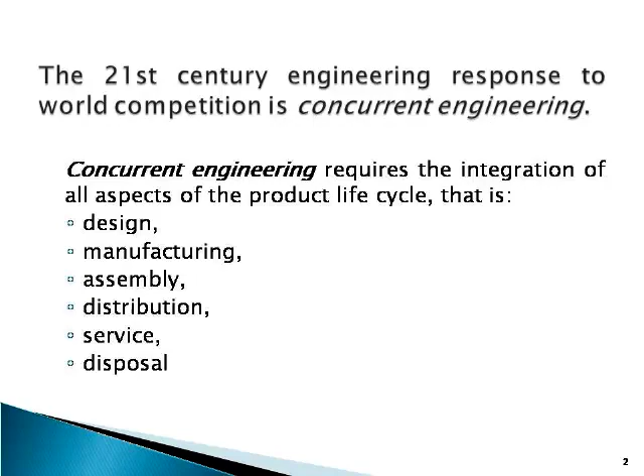The 21st century engineering we are entering in, its response to the world competition is concurrent engineering. Concurrent engineering requires the integration of all aspects of the product life cycle, that is design, manufacturing, assembly, distribution, service, disposal. Two important areas in the life cycle of a product are design and manufacturing. Process planning serves as an integration link between design and manufacturing.

Process planning consists of preparing a set of instructions that describe how to fabricate a part or build an assembly which will satisfy engineering design specifications.

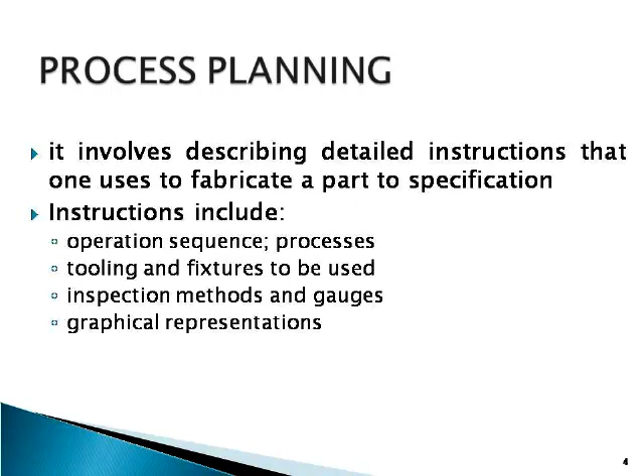So let us now discuss the process planning in detail. It involves describing detailed instructions that one uses to fabricate a part to specifications. The instructions include operation sequences or the processes, the tooling and fixtures to be used, inspection methods to be used, gauges to be used, and the graphical representations, etc.

Process planning is an act of preparing a detailed processing documentation for the manufacture of a piece part or an assembly. Systematic determination of the methods by which a product is to be manufactured economically and competitively. These are all various ways that we can discuss the process plan.

But we often confuse two words. One is process planning, the other one is production planning. In fact, process planning is entirely different from production planning. I am going to give you those things here.

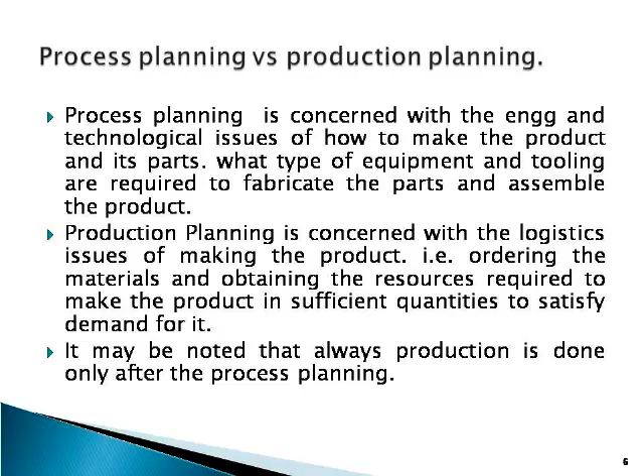Process planning is concerned with the engineering and technology issues of how to make the product and its parts, what type of equipment and tooling are to be used to fabricate the parts and assemble the product. Whereas production planning is concerned with the logistics issues of making the product, that is ordering the material, ordering the tools, obtaining the resources required to make the product in sufficient quantities to satisfy demand. It may be noted that production is always done only after the process planning.

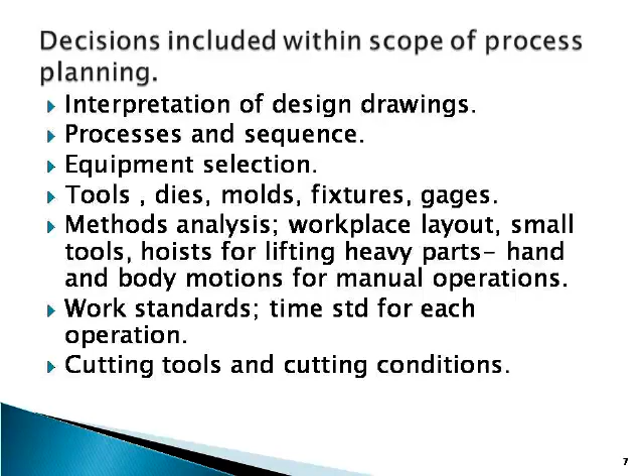The process plan indicates the routing sheet previously shown, and the drawing of the part. Scheduling is also a sheet which is done along with the process plan. With all these details, the drawings of the part, the route sheet, scheduling sheet, and process plan sheet, all put together will be sent to the manufacturing departments for the manufacturing people to follow the manufacturing steps in order to realize the component.

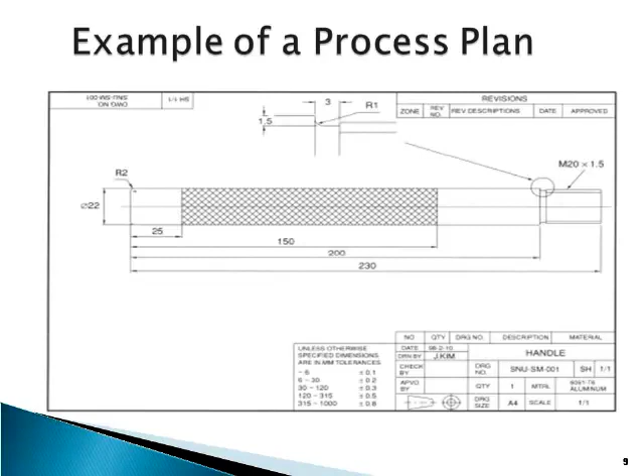So this is another typical process plan sheet being used. This is more or less a standard one, but the format could be different for different manufacturers. These are typical process plans used in industry, shown for our reference and better understanding.

If the process planner's productivity is significantly improved—because process planning is one act based completely on the process planner's view, expertise and knowledge—hence process planning done by one process planner could be different from another, and his time is very, very important.

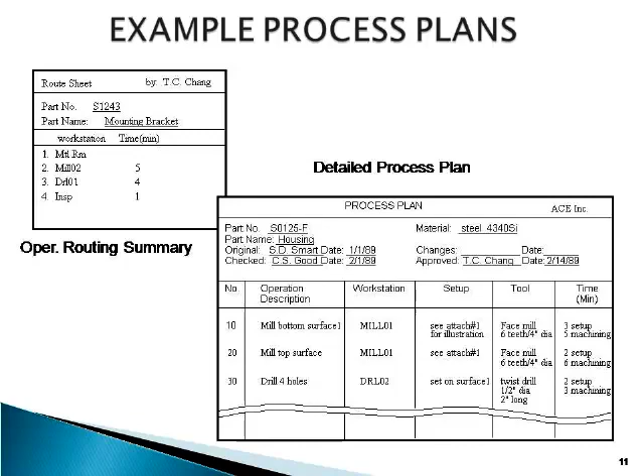If he could save his time, he would be able to spare the remaining time on various other aspects to improve productivity. He can spend more time on methods improvements and cost reduction analysis. Routings can be consistently optimized, and manufacturing instructions can be provided in greater detail.

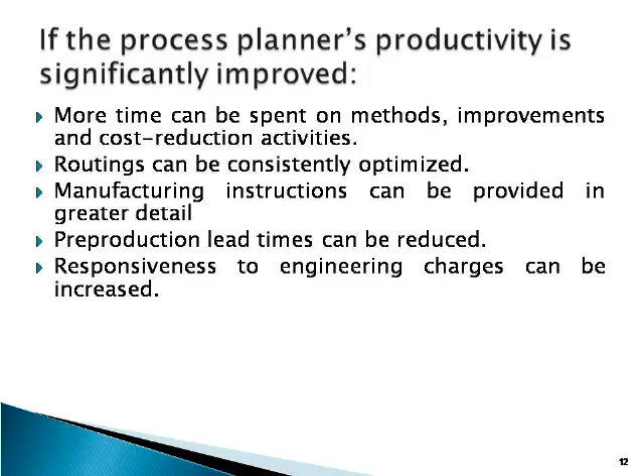Pre-production lead times can be reduced. Responsiveness to engineering changes can be increased. And the development of process plans involves a number of activities.

First is part print analysis, called analysis of part requirement. Then selection of the raw work part, that means the basic shape and size of the workpieces. Determining manufacturing options and their sequences. Selection of machine tools, selection of tools, work holding devices, and inspection equipment. Determining machining conditions and manufacturing time.

What is this analysis of part requirements? The part requirements can be defined as part features—process that includes the process determination steps of processes, dimensions, which will determine decisions regarding selection of machine tool size, and tolerance specifications, where the capability of machine tools can be selected based upon the tolerance specifications, and the CNC code generations, etc.

And selection of raw workpiece involves attributes such as basic shape of the workpiece. You can have standard materials, whether rod, slab, blank or profile, and the dimensions. Sometimes pre-shaped materials like cast parts, forged parts, extruded parts, and so on.

Size of the workpiece, basic raw material, and size of the machine tool—the size on which this workpiece is capable of being held—and material conditions, tool selections, and other things.

Determining manufacturing options and their sequences: selection of the processes based on availability, accuracy requirement, suitability, and cost. Sequence of operations—there are several operations. What operation is to be done first? What operation is to be done next?

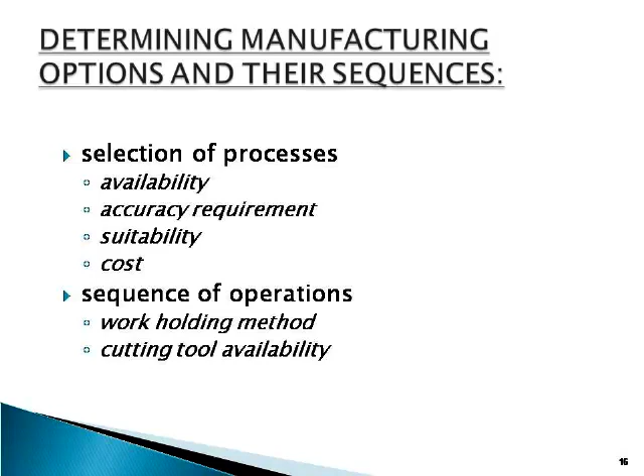Work holding methods: how best you have to hold the work so that maximum number of processes can be done on the given workpiece without change of setup.

Cutting tools availability, cost of the cutting tools—you can do the operation with the least cost tools, or you can do the operations with more costly tools. All this depends upon the process planner and how he selects it, and a very important thing is selection of machine tools.

Workpiece related attributes like part features and dimensions, dimensional tolerances, and raw material form. Machine tool related attributes, which include process capability, size of the machine, and mode of operation—manual, semi-automatic or automatic, CNC. If it's a CNC machine, CNC tooling capabilities, type of tool, size of tool, and tool changing capability, manual or automatic. Production volume related information is also required.

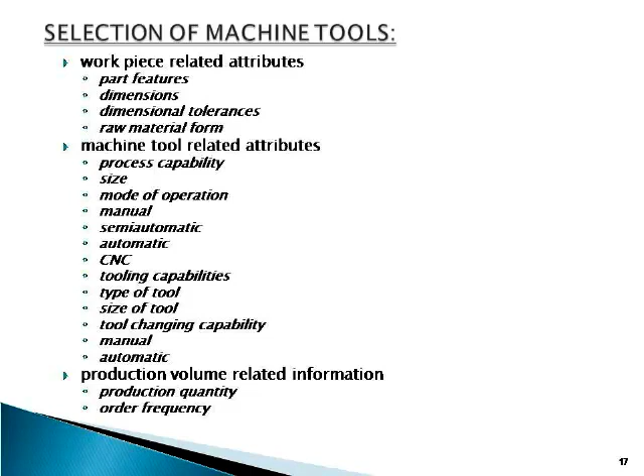For example, reaming cannot be done without drilling, so first a drill must be selected to drill a hole, then a reamer to ream the hole, and if tapping is to be done in the drilled hole, it can only be done after the reaming operation. Drilling, reaming and tapping must be done sequentially. You cannot do the reaming operation first and then drilling next. So this selection of sequence of steps is a process plan.

Take similarly the turning operation. There are several operations that can be done on lathe machines: simple turning, orthogonal cutting, tapering, profile turning, grooving, facing, face grooving, form cutting, boring, drilling, and several others like parting, threading, knurling. All these operations can be done on lathe machines. So you have to select the machine, select the process next, and select the tool also for that operation.

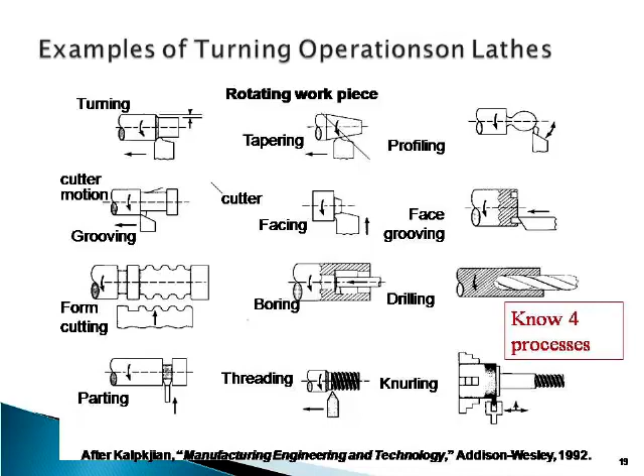Sometimes several lathe machines are available, and the appropriate lathe machine must be selected. This is done through evaluation of machine tool alternatives, based on machine tool capability, also called process capability. Process capability has to be evaluated for all the machine tools available on the shop floor, and this can be done by statistical tests.

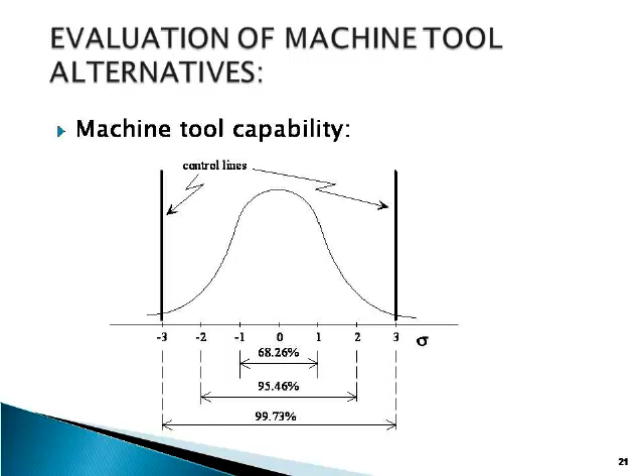After machining several components, say 100 or 200, in the same universe of discourse, you take the mean size and the deviations, plot them as a normal graph, and observe the deviations in plus or minus 3 sigma levels. Accordingly you calculate sigma, called standard deviation, as the square root of sigma of (x minus x bar) squared divided by (n minus 1), where n is sample size, or sigma equals R by d2.

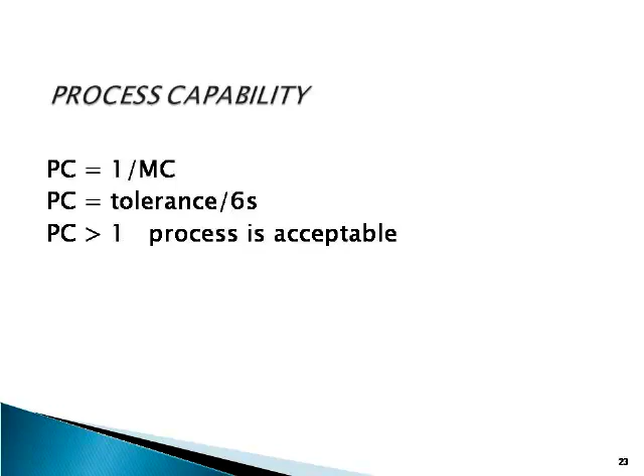Machine capability can be calculated as 6 sigma divided by tolerance, multiplied by 100 for percentage. Machine capability less than 100 means capability is good; more than 100% is not acceptable. So you must select the machine tool which is acceptable. Machine tool capability and process capability are inverse parameters: process capability equals 1 divided by machine tool capability, and is also equal to tolerance divided by 6 sigma. Process capability more than 1 means the process is acceptable, and if there is a choice of machine tools, the one with higher process capability must be selected.

Sometimes you can also select a machine tool based on the unit cost of the product. This is again a statistical test only; the distribution and size of finished parts are assumed to be normal. It can be done only by conducting statistical tests, and the results are available on the shop floor. The process planner should have these details before starting the process planning activity.

So they know the process capabilities and the cost of parts produced on a specific machine tool. This is done where ZU and ZL are the standard normal variates for upper and lower tolerance limits, TU and TL are the upper and lower tolerance limits, mu is the mean of the population, and sigma is the standard deviation. The portion of acceptable parts, AP, can be calculated as phi of ZU minus phi of ZL.

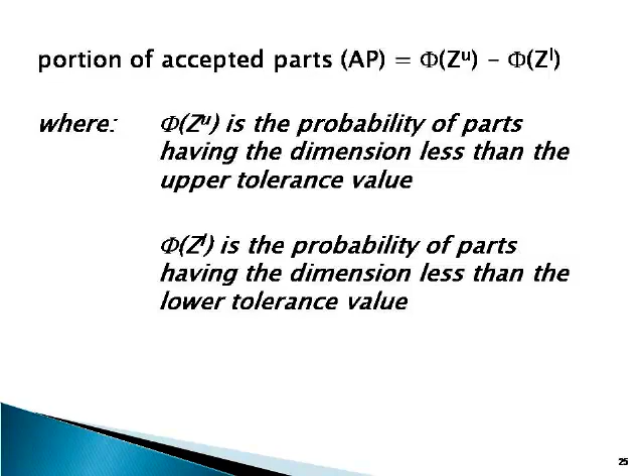Phi of Z of U is the probability of parts having dimension less than the upper tolerance value, and phi of Z of L is the probability of parts having dimension less than the lower tolerance value. So this is a typical process capability study, and how to calculate the portion of acceptable parts.

These are all already available, and this data is very much required for the process planner, then the selection of tools, work holding devices, and inspection equipment.

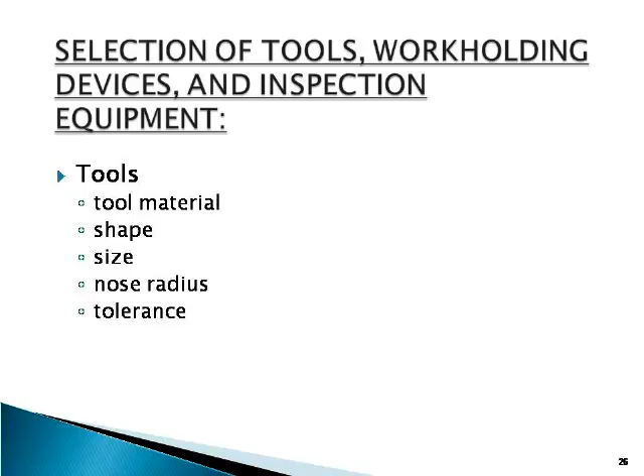Tools, we have to select based upon the tool material, shape, size, nose radius, tolerances. Suppose if it is a single point tool, we have to select the tool parameters also, because the kind of tool signature or tool nomenclature required for processing one kind of tool material could be quite different from other kinds of tool materials.

For example, if you drill in brass or copper, the point angle is less, sharp, compared to drilling a steel plate. So the tool parameters, tool signatures, or tool nomenclatures could be different. We must select the tool material and tool nomenclature depending upon the kind of workpiece for which you are selecting the machining process.

Work holding devices: the primary purpose of a work holding device is to position the workpiece accurately and hold it securely. Manually operated devices are collets, chucks, mandrel, faceplates. Design devices include power chucks, specially designed fixtures and jigs. Flexible fixtures are used in flexible manufacturing systems, like pallets and other things.

Inspection equipment includes online inspection equipment and offline inspection equipment. And the planner also selects the cutting conditions and the manufacturing times.

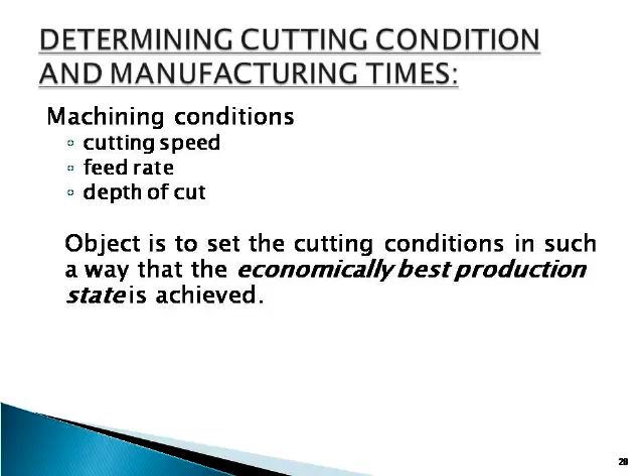That is machining conditions. Machining conditions include what cutting speed, what cutting feed, and what depth of cut you will select for a typical operation. The object is to set the cutting conditions in such a way that the economically best production state is achieved. That means the cost of machining must be less, and the quality of the product must be very good.

What is the economically best production state? It is either minimum production cost or maximum production rate; both indicate the same thing. Sometimes you have to choose the feed as low feed or high feed. Low feed is a finishing cut, and high feed is normally a roughing cut operation, so you go for high feed. High feed gives you more productivity, more metal removal, thereby more production rate.

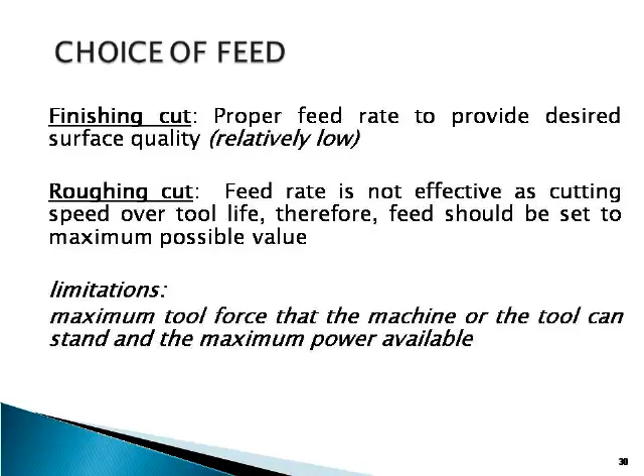Feed rate is not as effective as cutting speed on tool life, and therefore feed should be set to the maximum possible value. This is called the golden thumb rule of metal cutting: you must choose as high a feed as possible in a rough cutting operation. Limitations are the maximum tool force that the machine or tool can stand, and the maximum power available.

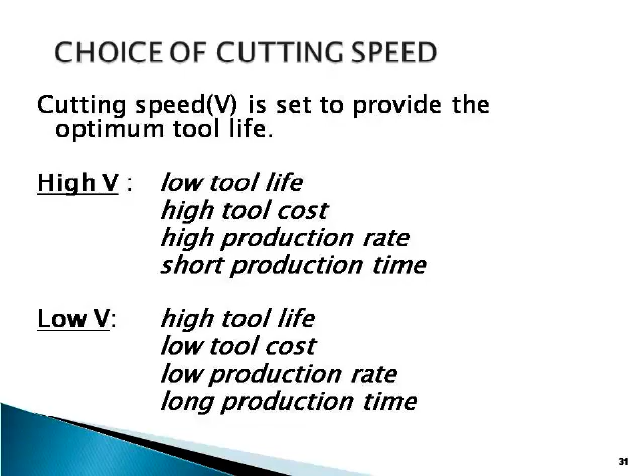Choice of cutting speeds: you can select high speed or low speed. High speed will give you low tool life, high tool cost, high production rate, and shorter production time. Low speed gives high tool life, low tool cost, low production rate, and long production time.

Sometimes you can also calculate minimum cost per piece. Minimum cost per piece can be calculated as the sum of the non-productive cost plus machining cost plus tool changing cost plus tooling cost. This is a popular equation available in any metal cutting textbook, and particularly, the book Metal Cutting by Geoffrey Boothroyd has discussed all these things in detail.

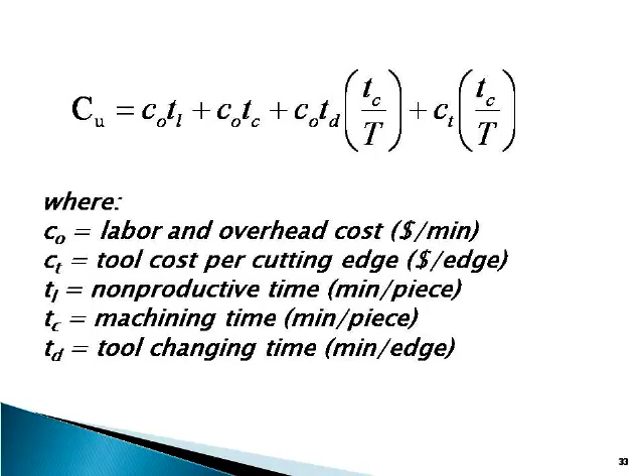Cu is equal to C naught Tl plus C naught Tc plus Co Td Tc by T plus Ct Tc by T. So the other parameters have been given here. We can calculate the total cost of the component using this.

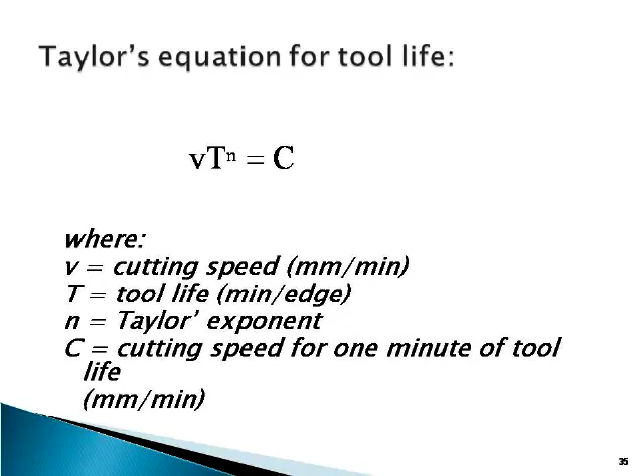For a single pass turning operation, Tc is equal to pi L d by V f. We know Taylor's equation for tool life, V T power n is equal to C, where V is cutting speed, T is tool life, n is the Taylor's exponent, and C is the cutting speed for 1 minute of tool life.

Combining the above equations, one can get the cost per piece equation like this. This equation can be further optimized. Differentiating this equation with respect to cutting speed and equating it to zero, then solving for cutting speed, will give you the cutting speed for minimum production cost.

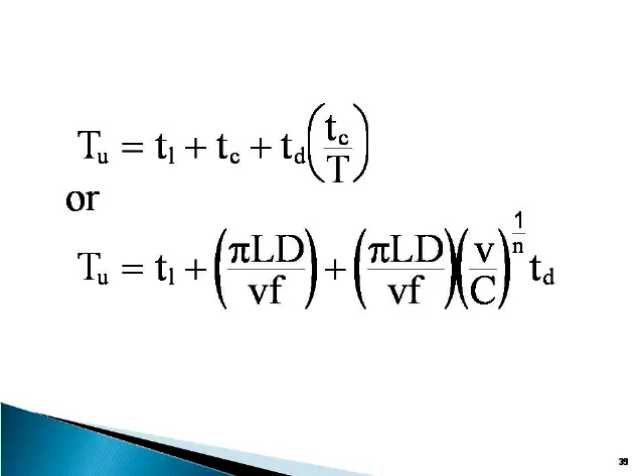Similarly, for maximum production rate, TU is equal to non-productive time plus machining time plus tool changing time, and TU can be calculated by this equation. Again, by differentiating TU with respect to V and equating it to zero, then solving for V, will give you the cutting speed for maximum production rate.

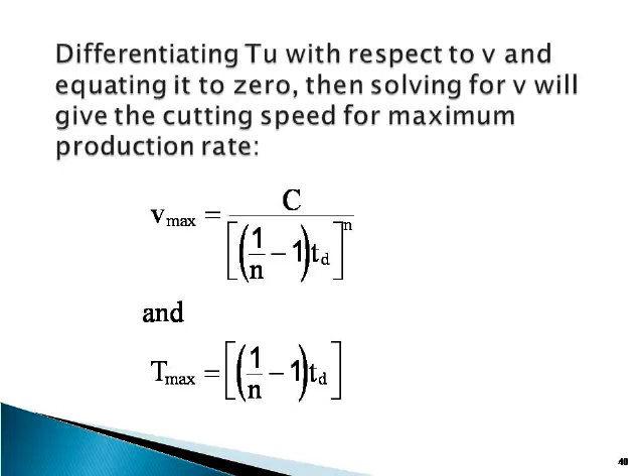And afterwards, manufacturing lead time can be studied and calculated as lead time equals S plus TU, multiplied by Q.

Q is lot size, TU is equal to production time per piece, and S is equal to major setup time. If you know these things, we can calculate these machining parameters, and you can select the cutting speeds and cutting feeds, and accordingly lead time also can be calculated.

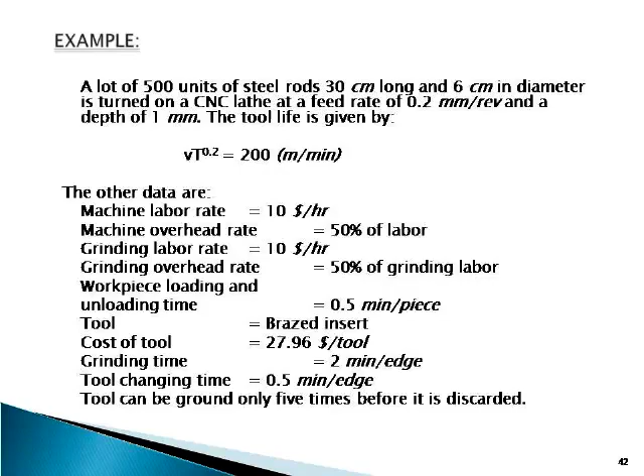Here is a small example given to get much more clarity of the topic. A lot of 500 units of steel rods of 30 centimeters long and 6 centimeters in diameter is turned on a lathe machine at feed rate of 0.2 mm per revolution, and depth of cut is 1 mm. The tool life is given by this equation.

The other relevant data has been given here, and we were asked to determine optimum tool life and optimum cutting speed to minimize the cost, optimum tool life and optimum cutting speed to maximize the production rate, minimum cost per component, time per component and corresponding lead time, maximum production rate, corresponding cost per component and lead time.

You can calculate the relevant parameters given in the previous equations using the values given in this problem. As C0, you can calculate it, and we got it as $0.25 per minute.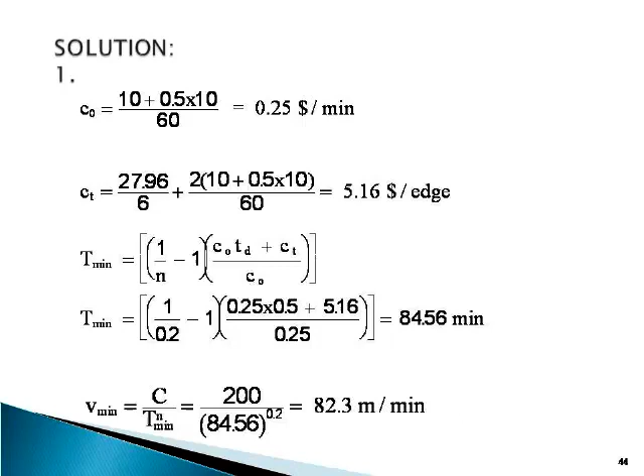CT is equal to $5.16 per edge, and T minimum we got it as 84.56 minutes, and V minimum we got it as 82.3 meters per minute, and T maximum is 2 minutes, and V maximum is 174.1 meters per minute.

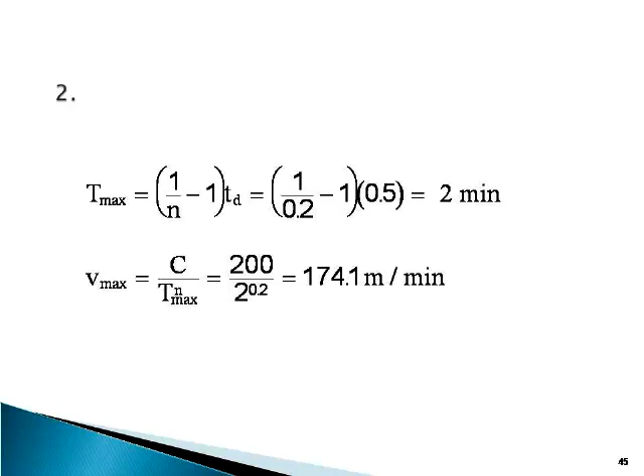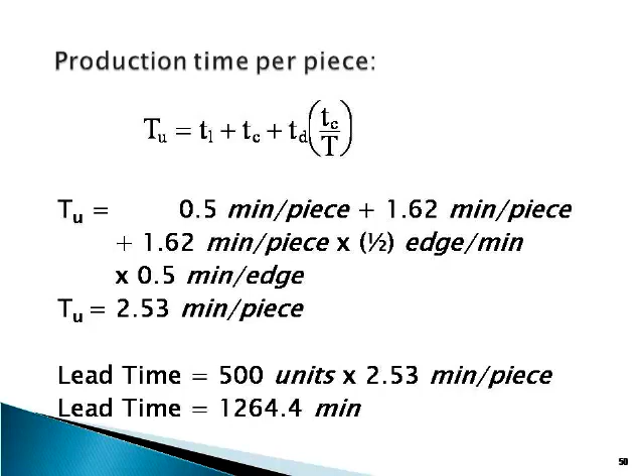Minimum cost TC is equal to $3.4 per piece, and CU is we got it as $1.2 per piece, and time per component can also be calculated, and maximum production rate is calculated as 1.62 minutes per piece, and production time per piece is calculated.

And we know after this example we can easily conclude that we can select the speeds and feeds in such a way based upon what we want.

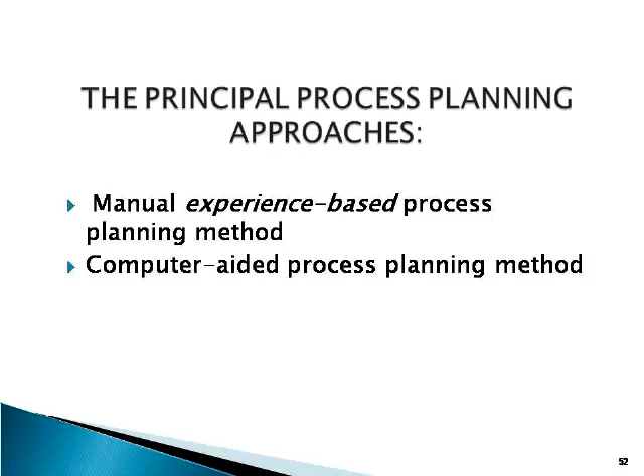Now, what are the various process planning approaches that are normally adopted here? One which is being adopted anciently is manual or experience-based process planning method. Even today it is popularly used. Second one is computer aided process planning method. Let us discuss these things.

Manually method or experience-based process planning method. This method is most widely used, but it's time consuming because it completely depends upon the human planner and his knowledge and experience, and it leads to inconsistent plans.

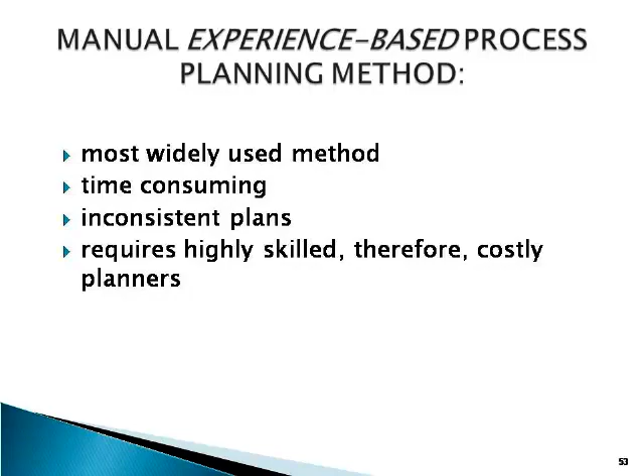Today, if I am the process planner and do the process planning activity today, it would be like something, and if I do it after a few days, I could do another process plan. Both process plans are correct in all aspects. If you adopt this process plan or that process plan, it gives you the best component. But the sequence of steps and other things followed in one plan could be different from the other plan. So there is most inconsistency in this activity.

You can have only one kind of process plan if the part is so simple. If the part is complex, meaning many machining features are on the part, then the complexity of the part is increasing. And if the part is complex enough, we may have to have more than one process plan generated. That's why in manually experience based process planning system, we'll have inconsistency in plans.

It requires highly skilled and knowledgeable persons. It all depends upon the experience of the process planner and his knowledge base. This is the manual approach to process planning.

Its use is still very widely spread in small to medium sized companies, especially in the aerospace industry. It involves subjective judgments reflecting personal preferences and experiences. Plans prepared by different planners for similar parts are usually not identical. It's very labor intensive, like 40% of the task involves preparation of documentation.

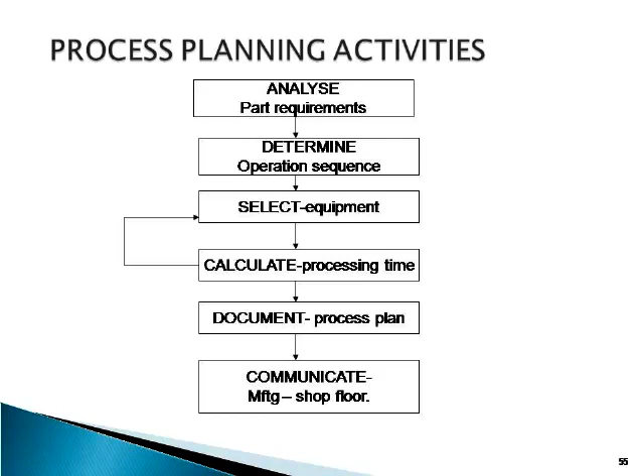Factors affecting the process planning activity are volume of production, the skills and expertise of manpower, delivery dates, the schedules, material specifications, accuracy and process capabilities of machines, and accuracy requirements of parts and products.

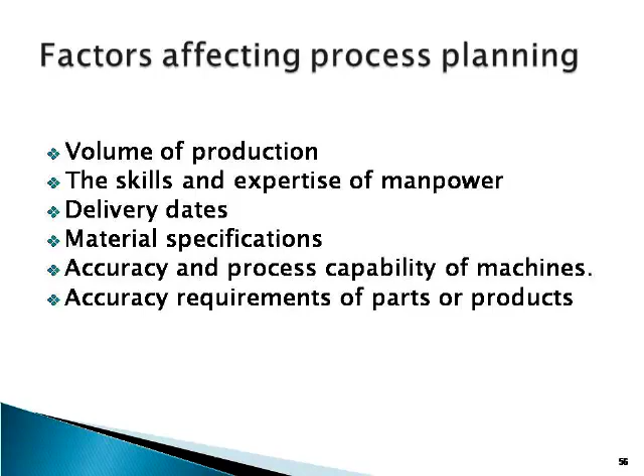Because of these variations, we need to automate the process planning activity. Can we make process planning computerized or computer-augmented? Yes, it is required to develop computer-aided process planning in order to have consistency in process plans, reduce redundancy, and reduce preparation time. Particularly in the age of computer integrated manufacturing, we have no option except computer-aided process planning in order to link the CAD and CAM departments.

Process planning provides the link between CAD and CAM. The process planning function converts engineering designs into fabrication instructions. Thus, automated process planning is key to integrating CAD/CAM and computer integrated manufacturing. Without automated process planning, CIM would be impossible.

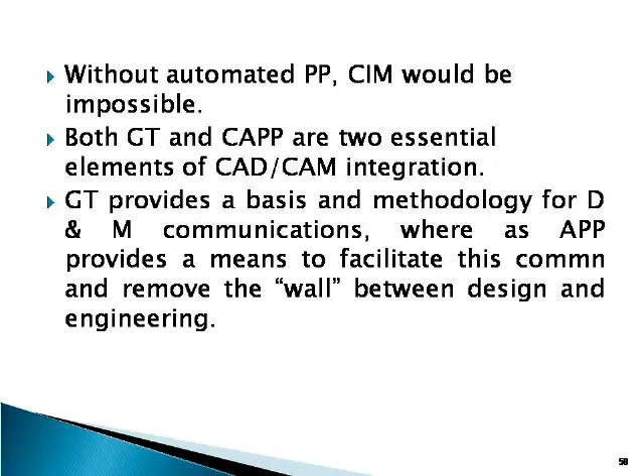Both group technology and computer-aided process planning are essential elements of CAD/CAM integration. We already discussed group technology, which provides a basis and methodology for design and manufacturing communication, whereas automated process planning provides a means to facilitate this communication and remove the wall between design and engineering. CIM cannot occur until the process is automated. Consequently, automated process planning is the link between CAD and CAM.

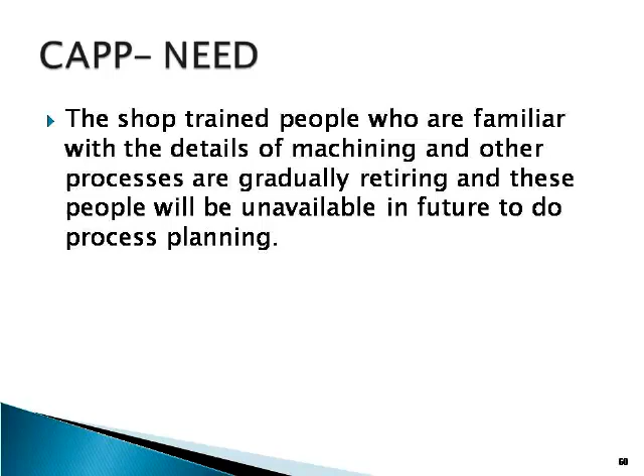We have to go for automated process planning because of this need. There are certain potential benefits of automated process planning, including a 50% increase in process planner productivity, 40% increase in capacity of existing equipment, 25% reduction in setup costs, 12% reduction in tooling, 10% reduction in scrap and rework, 10% reduction in shop floor labor, 6% reduction in work in process, and 4% reduction in materials.

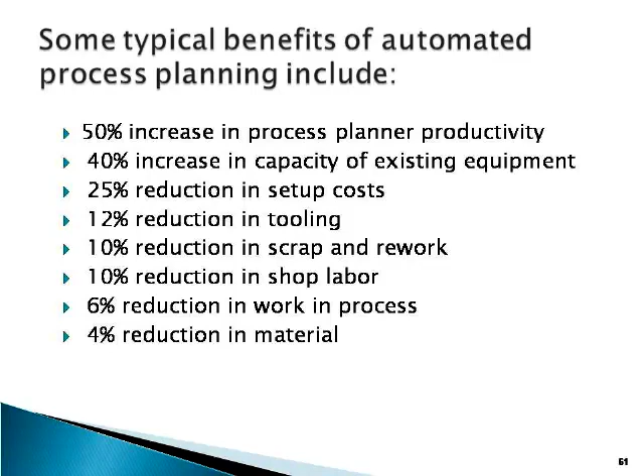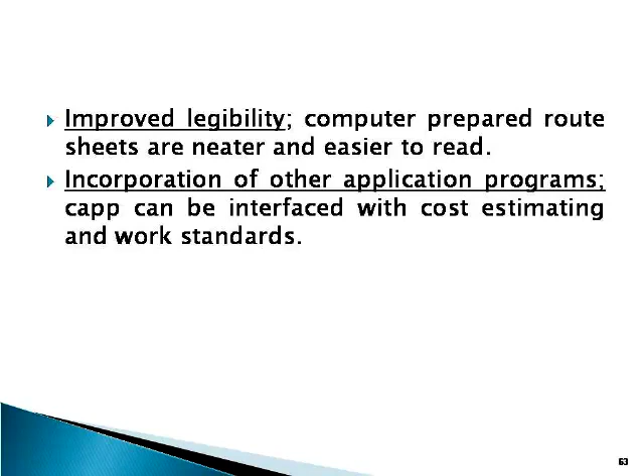Other benefits include process rationalization and standardization. CAPP leads to more logical and consistent process plans, lower manufacturing cost and higher quality, increased productivity of process planners so more work can be accomplished, and reduced lead time for process planning. It also improves legibility, since computer-prepared route sheets are neater and easier to read, and allows incorporation of other application programs, so CAPP can be interfaced with cost estimation and work standards.

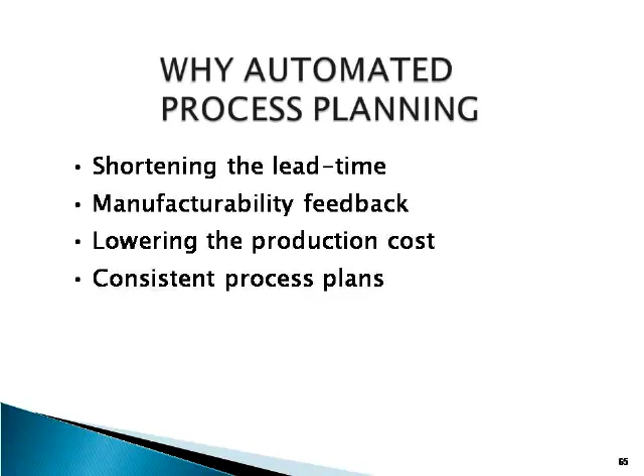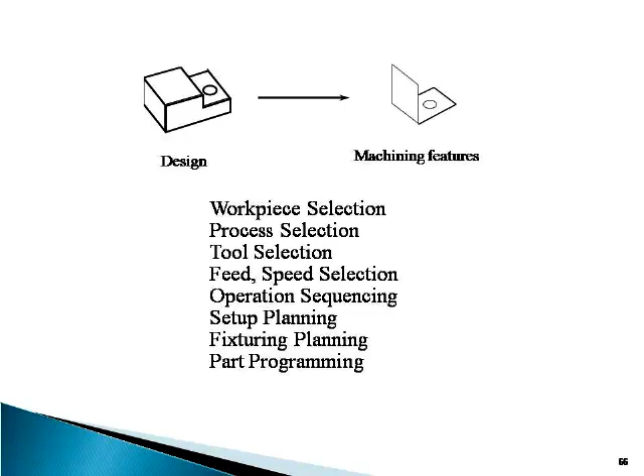How do we achieve CAPP, computer-aided process planning? There are two approaches. One is called retrieval or variant computer-aided process planning system. The other is called generative computer-aided process planning system. Sometimes the two systems combine and are known as semi-generative computer-aided process planning.

Let us see what this variant process planning approach is. This variant process planning approach is a group technology based approach, dependent on good data mining and search engines. A variant CAPP system requires a database containing standard process plans. A standard process plan is stored in computer files for each part code. The standards are based on current part routings in use in the factory, or an ideal plan prepared for each family. The system has provisions for editing a particular standard plan to accommodate product variation.

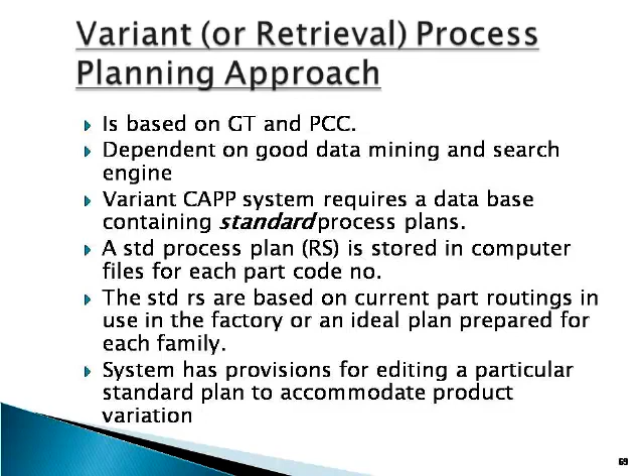In the variant CAPP method, process planning is developed for a master part or composite part, which represents common features of a given part family. The master part is one which has the common features of a family of parts. Suppose you have several parts of a family; all the features of these parts the master component has. So if a master component has a feature, that feature must be present in one of the parts of that particular family.

A process plan for a new part is created by recalling or identifying and retrieving an existing plan. Just by doing some editing operation of the existing process plan, we can generate the process plan for the new part, and we can do certain modifications for the new parts, and we can again store the new part process plan against the GT code.

To use this method efficiently, a parts classification coding system must be used. We need a very good parts classification and coding system in order to have a very good variant CAPP system. In a nutshell, the entire schema of the retrieval CAPP system or variant CAPP system is presented here, in which a new part design comes in, and for that we need to develop the process code. First, when the part design comes, we need to derive the GT code, group technology code, and against the group technology code, search for the part family file containing the GT code. So we need to have a part family file in which the GT code is searched.

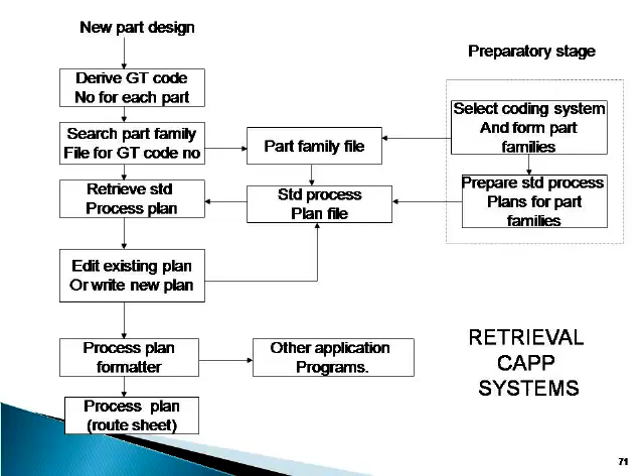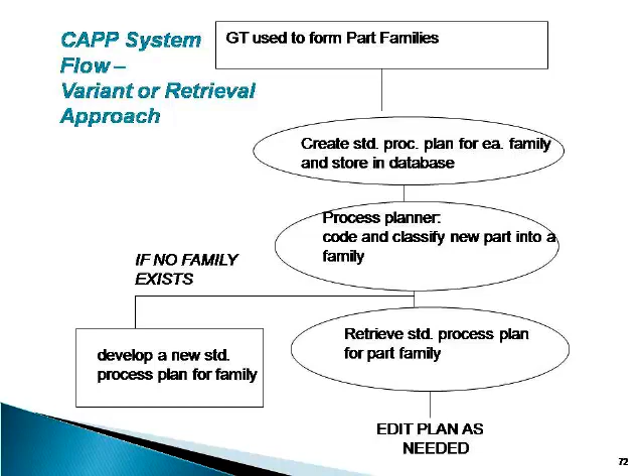In a CAPP system, again, use GT code to form part families and create standard process plans for this family and store them in a database, and the process planner codes and classifies the new part into the family and retrieves the standard plans like that. The data files required and the steps in the preparatory phases are: selecting the appropriate classification and coding system for the company, forming part families for the parts produced by the company, preparing standard process plans, and you have to repeat steps two and three as new parts are designed and added to the company's database - the capacity to alter an existing process plan.

You can see this table containing different variant process planning systems that are available in the literature, and some of them are also available commercially: CUTPLAN, CAPP, COMCAPP V, DCLASS, INTELLICAPP, MAYCAPP. These are the systems and the companies that developed them, and the decision logic and functions they are based on are given in this slide. This slide is self-explanatory.

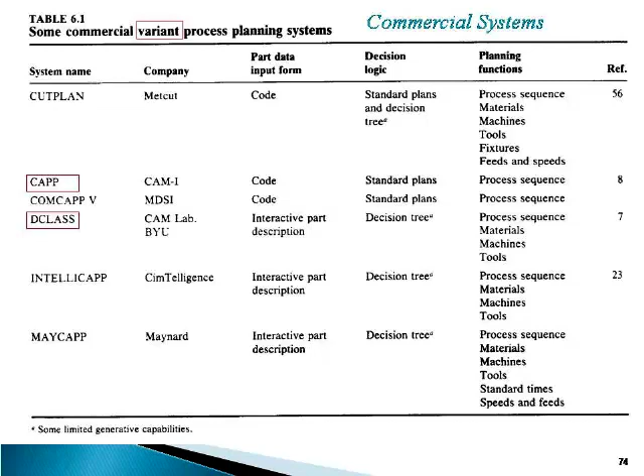Let us discuss the advantages of the retrieval CAPP system. Once the standard plan has been written, a variety of parts can be planned. Comparatively simple programming and installation is required to implement a planning system. Efficient processing and evaluation of complicated activities and decisions, thus reducing time and labor requirements. Standardized procedures by structuring manufacturing knowledge of process planners to company needs. Lower development and hardware costs, shorter development times.

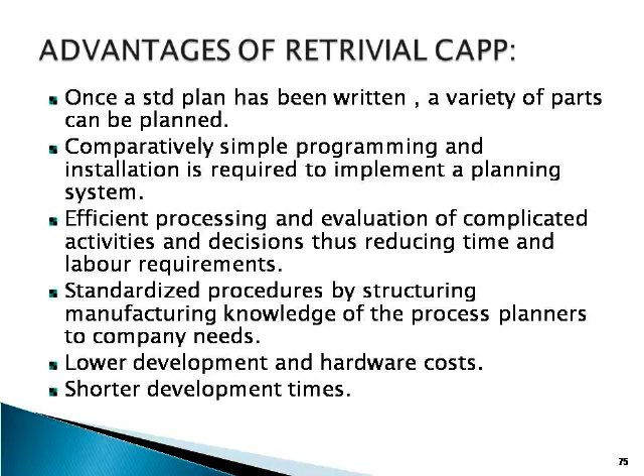Efficient processing and evaluation of complicated activities and decisions, thus reducing time and labor requirements. Standardized procedures by structuring manufacturing knowledge of the process planners to the company needs. Lower development and hardware costs, shorter development times.

Disadvantages of the variant process planning system: maintaining consistency in editing is difficult. It is difficult to adequately accommodate various combinations of material, geometry, size, precision, quality, alternate process sequences, machine loading, etc. The quality of the final process plan generated depends, to a large extent, on the knowledge and experience of the process planner.

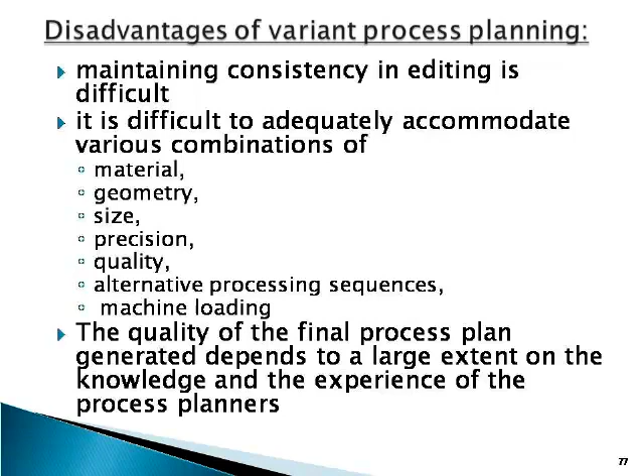The system is understandable, the planner has control of the final plan, it is easy to learn and easy to use. Drawbacks are: the components to be planned are limited to similar components previously planned. Maintaining consistency in editing is difficult. Experienced process planners are still required to modify the standard plan for a specific component.

Now let us discuss the generative computer-aided process planning system. An automated computerized system is used to generate each individual process plan automatically, without reference to a prior plan.

It is an automated computerized system used to generate each individual process plan. It does not take the database of process plans and edit them like variant. Any part for which you need to develop the process plan starts from scratch. So process planning is done automatically without reference to prior plan.

The system consists of decision logic, formula, technological algorithms, and geometry-based data. The computer automatically generates a unique operation and route sheet whenever a part is ordered. Instead of retrieving and editing an existing plan contained in a computer database, it creates the process plan based on logical procedure. The process sequence is planned without human assistance and without a set of predefined standard plans.

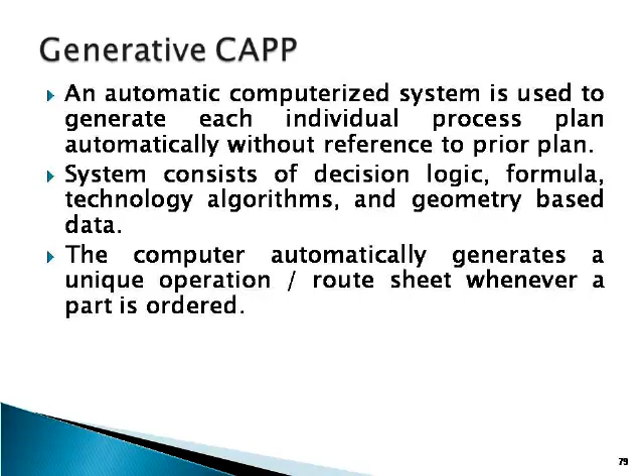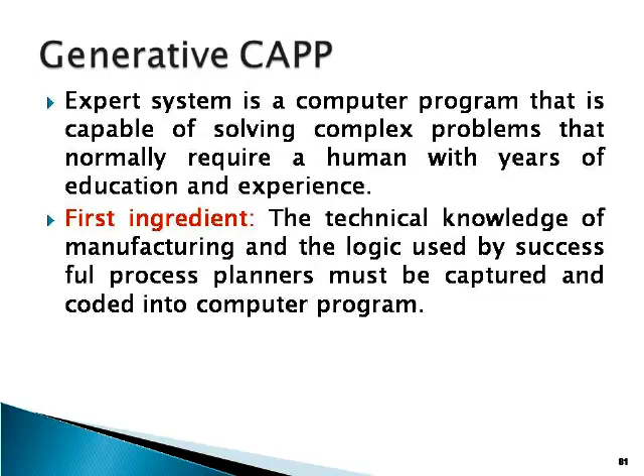Expert systems and artificial intelligence algorithms have been used to develop generative process plans. An expert system is a computer program capable of solving complex problems that normally require a human with years of education and experience. The first ingredient is technical knowledge of manufacturing and the logic used by successful process planners, which must be captured and coded into a computer program.

The knowledge and logic of the human process planner is developed into a knowledge base. The generative system then uses that knowledge base to solve process planning problems.

The second ingredient for generative CAPP is a computer compatible description of the part to be produced, including pertinent data and information needed for the plan. The part description can be conveyed two ways: as a geometrical model like CAD, or as GT code.

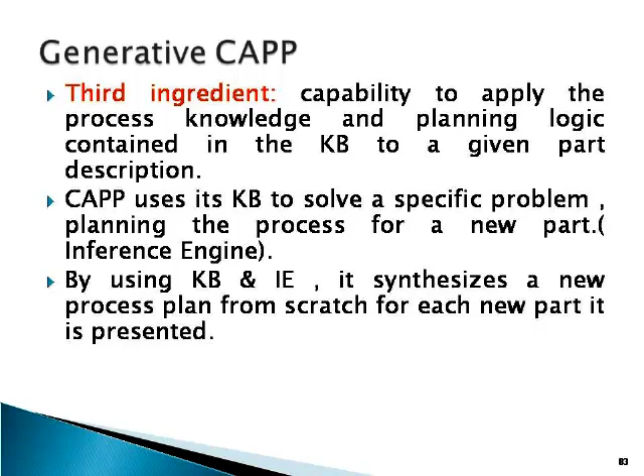The third ingredient is the capability to apply the process knowledge and planning logic contained in the knowledge base to a given part description. CAPP uses its knowledge base to solve specific problems, planning the process for a new part, like an inference engine. By using the knowledge base and inference engine, it synthesizes a new process plan from scratch for each new part presented.

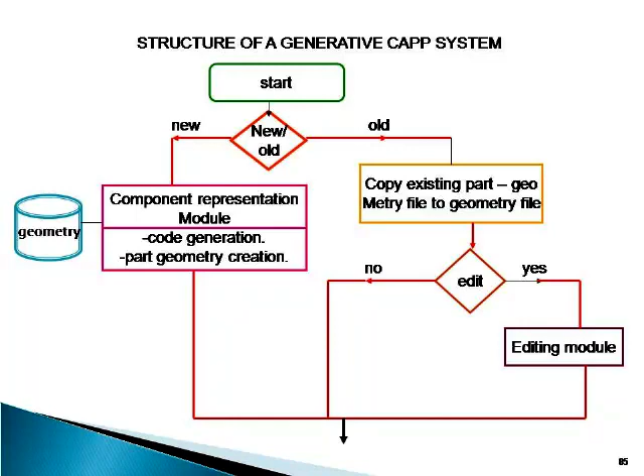But there is no unique generative process planning system developed so far which can address the problems of prismatic parts as well as rotational parts. However, the study on generative process planning is still continuing.

The structure of a generative process planning system is like this. Let us say we start with a new part, and the component representation module. You can develop the component representation, meaning input to this by means of geometry, that is CAD. You can use computer aided design details which consist of geometrical details, or sometimes you can give the part geometry creation in a user defined way.

You can create the geometrical details and give it as an input to this. And if it is an old part, you copy the existing part or geometry file and do editing, for which an editing module is available.

Once that is over, the operation extraction is done by the sequencing module, which covers operation selection, intermediate process, dimension computation, and operation sequencing. These operation sequencing algorithms are required to prioritize the operations and sequence them.

Selection of the machine tool is to be done through the machine tool selection module. A huge database of machine tool availability and machinability conditions available on the shop floor must be maintained, and this database interacts with this module to extract the necessary data.

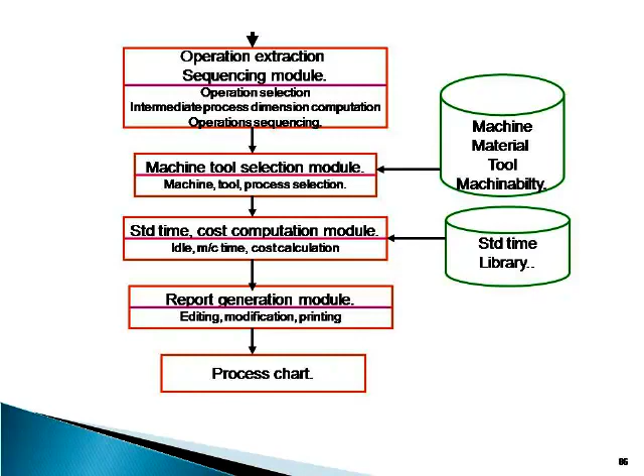Components of generative computer aided process planning consist of: description, component characteristics, geometric features, dimensions, tolerances, and surface conditions; a subsystem to define machine parameters; a subsystem to select and sequence individual operations; and a database of available machines and tooling.

A report generator is also included. Let us discuss the generative CAPP system in the form of steps. The first step is to input engineering specifications into the CAD system, that is, part features which can be given like geometrical features, tolerances, sizes, locations, etc.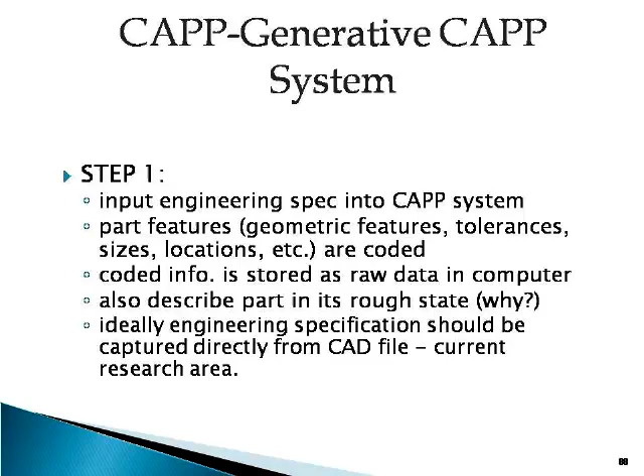Sometimes the coded information is stored as raw data in the computer, also describing the part in its rough state, which should be given as input. Ideally, engineering specifications should be captured directly from the CAD file, and current research is also focused on giving the CAD file as a direct input to the CAPP module. The input may be in the form of .dxf files, PDES files, or step files, and this information is given as input to the CAPP module.

Step 2: Generate programs to transform coded data and textual information into a detailed process plan. Whatever coded or textual information is there will be converted and a process plan is generated. This requires complex algorithms and large databases to accomplish.

Algorithms for sequence prioritization, process selection, and machine tool selection are all included, with integration with databases. It works by reading the input file and understanding it, selecting the features, selecting the machining process suitable to the features, prioritizing the machining process, selecting machine tools for each machining process along with machine tool type and number from the database, selecting speeds and feeds and tools to machine the features, and then listing and printing them in the form of a process plan.

No universal generative process plan exists. There are some for special classes of parts with limited geometrical features.

I would like to give an example process plan system called Computer Managed Process Planning, CMPP, which was developed at the United Technologies Research Center. It is commercially capable of automatically making process plan decisions with interactive capabilities. This interactive capability facilitates the user to examine and modify a process plan as it is developed.

It was developed specifically for machined cylindrical parts. The CMPP system works like this: interactive input through the design system defines the part model, and a part design file is created. A process decision model file is created through planning logic and defined manufacturing logic. Machine data is defined through manufacturing resources, and a machine data file is created, to perform planning functions.

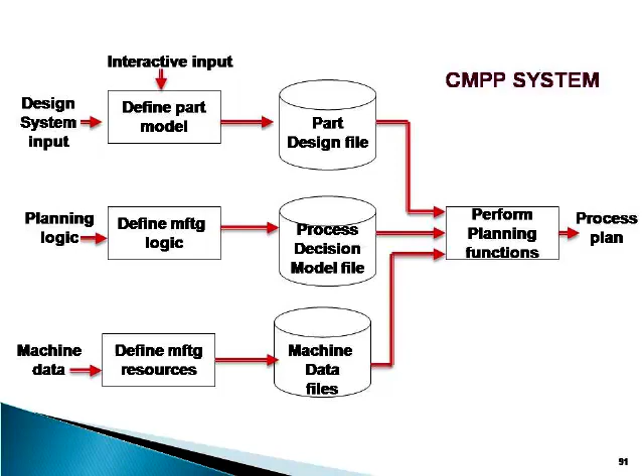All this is given as input to the subsystem that performs planning functions to generate the process plan. First, databases containing specific information about available machine tools, stock removal allowances for cutting materials, types of cuts, tolerance, and machinability must be developed, along with the process decision model. Manufacturing logic and resources for a particular form should be developed.

PDM technique is used to define local manufacturing rules, defined by the use of COPPL, Computer Process Planning Language. It requires raw material geometry, dimensions, final part shape, tolerances, surface finish, geometric form conditions, material specification, and surface treatment.

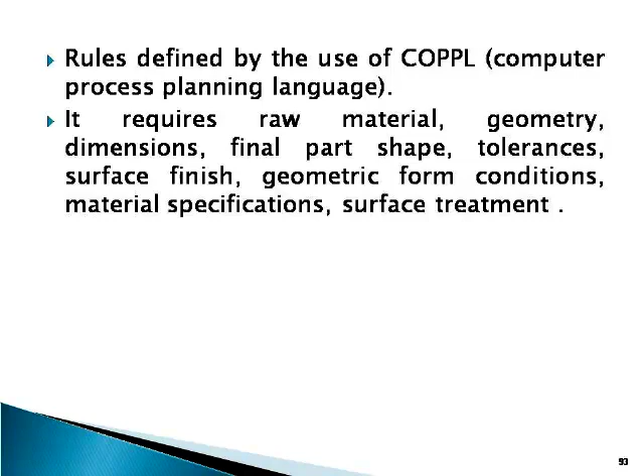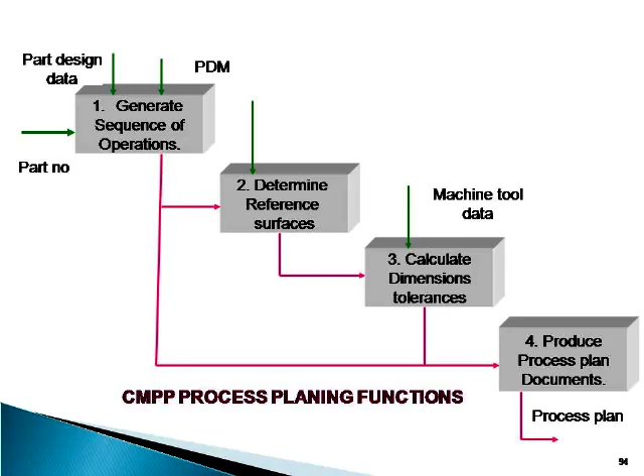CMPP process planning functions are shown in this schematic, in which the sequence of operations is first generated from the part design data, then reference surfaces are determined, dimension tolerances and machine tool data are calculated, and process plan documents are produced.

For each operation, operation number, description, type of machine, orientation of the workpiece on the machine, surfaces cut, and heat treatment are given. Dimensioning reference surfaces for each cut in each operation is defined, and machining dimensions, tolerances, and stock removal for each surface cut in each operation are given.

A printed summary of operations, a printed tolerance analysis, and dimensioned workpiece sketches for each machining operation are available.

Now let us compare the two methods we have discussed so far: variant process planning systems and generative process planning systems. When comparing coding, that is the computer programming, the generative system is very detailed, whereas the variant system is complicated for part geometry, especially if you have a huge number of part families. If you have a complicated composite part, variant is better.

With respect to part geometry, variant is complicated, whereas generative is simple. Similarity between the family of components is very high for variant, because the part is retrieved from part families, so the similarity of the part component is very high. If it is dissimilar, variant will fail, whereas generative is best suited for dissimilarity of the component, meaning it generates the process plan for any component at any time.

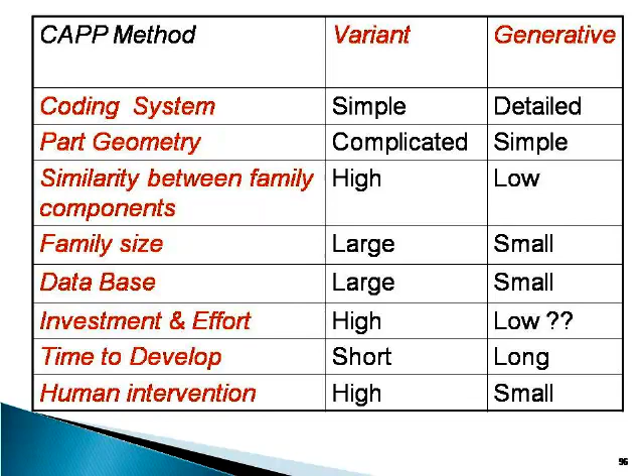So for editing, human intervention is required in the variant approach, whereas human intervention required is very small in the generative approach.

Now let us discuss how to select a CAPP system. The first point is classification and coding capability—the ability to change part attributes, and if you have process planning retrieval capabilities, that would be very high.

The second point is graphics capabilities. Based on CAD database management, you can select either one of these methods.

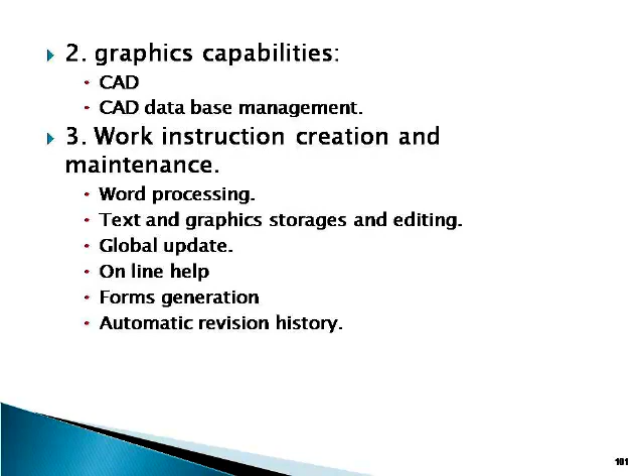The third is work instructions creation and maintenance, like word processing, text information, graphic storage, editing, global update, online help, form generation, automatic revision history, and process planning capabilities—variant, generative, hybrid, or part family identification.

This includes capturing knowledge of process parameters, selection of tools, time standard capabilities, calculation of standards, access to other vendors' standard time modules, and machining parameters like selection of speed, feed, and determination of stock removal.

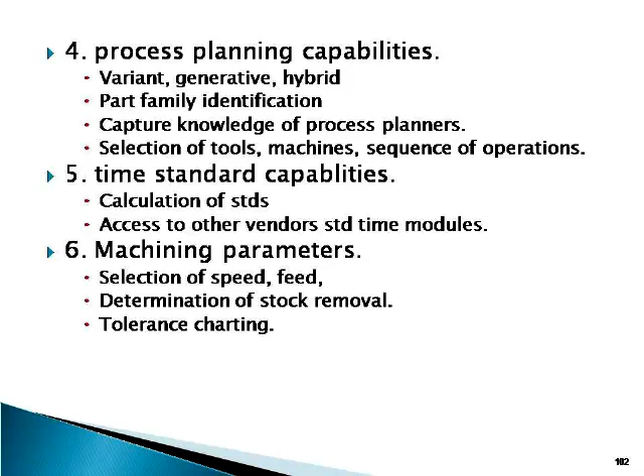These are all the parameters you select for the process plan, along with total system considerations like hardware requirement, database management capabilities, interface to other software systems like MRP, system cost, ease of use, future enhancement, and vendor specifications.

Selecting a process plan means defining the objectives for the CAPP system, capturing manufacturing expertise and making it available plant-wide, reducing manual input in process planning, facilitating integration of CAD and CAM, and developing optimum and consistent process plans.

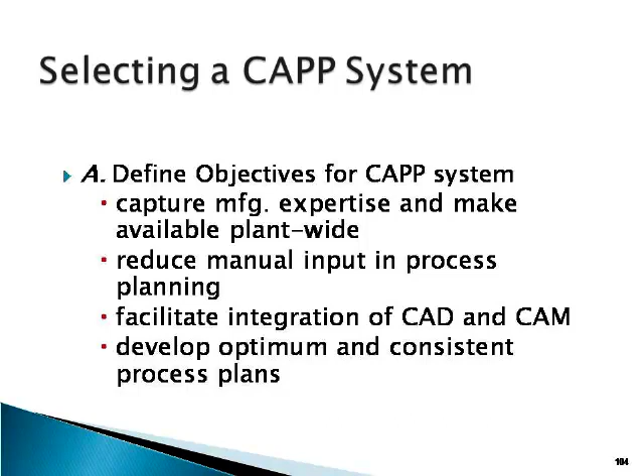Specify criteria of the CAPP system: classification, coding capabilities, graphic capabilities, process planning features, work instructions, time standards, and other things. Based on this information, we can select the available process planning system.

You can represent the product as geometrical information, part shape, design features, technological information, tolerancing, surface quality, special manufacturing notes, feature information, and manufacturing features.

This knowledge of the entire process can be presented in the form of predicate logics and production rules, semantic nets, frames, and object-oriented programming. All these things are used in CAPP systems and CAPP programming.

We need to do a lot of discussion in order to know that, so I'm not going into the depth of these logic rules and how to develop the process plan. We have only discussed the various process plans, but not how to develop them.

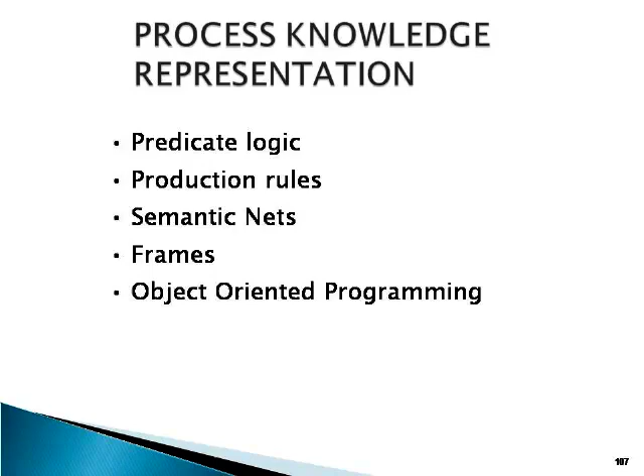Regarding the development of CAPP, if you observe, from 1960 onwards several attempts were made, and up to 2000 the work is still going on.

To this day we do not have a unique CAPP system that can address all sorts of computer-related problems. But today we have highly automated systems with a lot of intelligent and decision-making algorithms embedded in them.

They can retrieve certain attributes which are taken into decision logics, and decision-making algorithms are available. With all that, some of the systems act as experts and give process planning as an output.

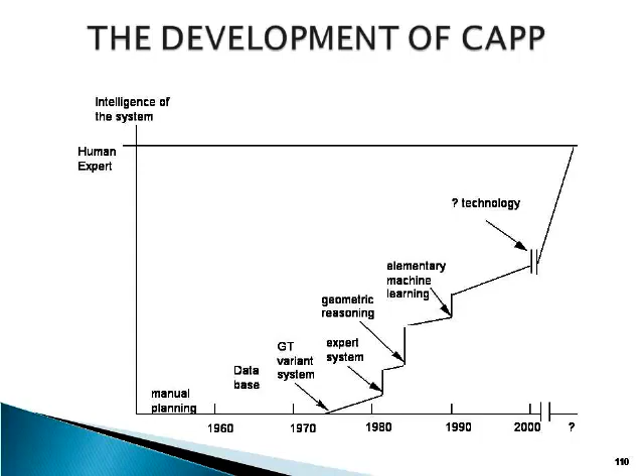Friends, with this I would like to conclude the discussion on computer-aided process planning.

We have discussed computer-aided process planning limited to classwork knowledge only. I have not discussed in detail the works which are going on particularly in computer-aided process planning.

There are several works, even at NIT Warangal, that we are doing particularly using STEP databases, etc. We are also developing several algorithms—several genetic algorithms and other fuzzy logic algorithms—to identify features.

Based upon the feature selection for process planning generation, such kinds of works have been done using decision logics and predicate logics, etc., but we have not discussed all of them here.

But friends, as a whole, we have discussed the importance of process planning, the types of process planning, and the need and importance of computer-aided process planning, and what types of process plannings are available, like variant and generative systems.

If it is a variant system, what kind of knowledge is required to develop it, and if it is a generative system, what kind of knowledge is required to develop generative systems.

We have also discussed CMPP as an example, and with this I thank you all for your patient listening to the topic, which we can also discuss more elaborately.